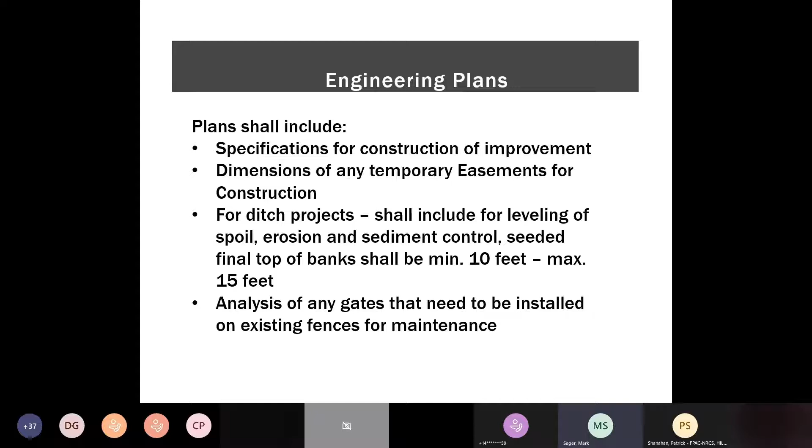There's going to be still analysis of any gates or existing fences that might be taken out and whether they need to be installed or maintained on this project. We don't run into this a lot, but sometimes it is out there.

After survey plans and specs are complete, the board shall prepare a schedule of damages to be included in the estimate. Estimate of cost of construction shall include construction costs to meet specs, the schedule of damages, and any costs incurred in investigations, consulting services, notifications, and other incidental costs. So they kind of left us in there for putting in those costs for mailings. If you had to send out soils for lab work and there was a cost associated with that, or if you had to get a consulting engineering company in there to help out, you could include that into your estimated cost for the project.

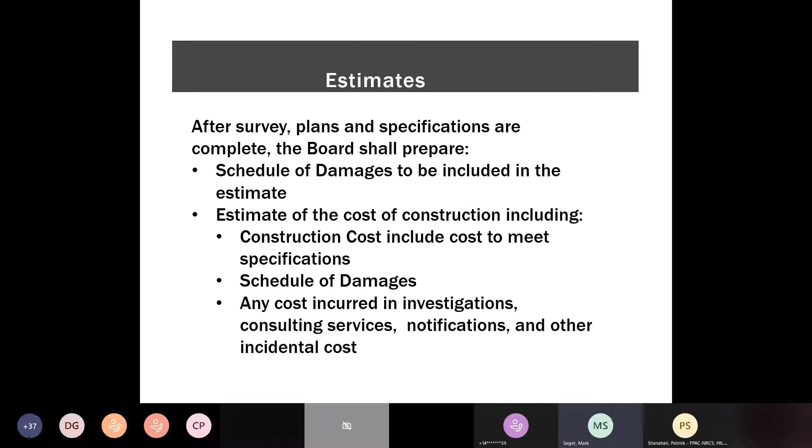Okay, schedule estimated assessment - so you've got your plans, your specs, your damages. The Board of Supervisors or designees shall prepare estimated assessments. Currently it says the Board of County Commissioners. I know that a lot of districts were doing those estimated assessments, but now it's coming back to the Board of Supervisors or their designee. I'm not saying you can't work with the county engineer or the county commissioners to make sure it's all on board, but you can include that.

I want to step back just a quick step in who's invited to the view and the hearing. It is recommended, or requested, that you invite the Board of Commissioners, the county engineer, and any other folks that may have an interest in this project down the road. It doesn't say they have to be there, but it does tell you that you should invite those folks so they're informed of this project as it's moving forward.

Again, sodded strip, you can find this in 940.26. Current law says 4 to 15 feet. Basically now it says no fewer than 10 feet for that sodded strip. That sodded strip shall be compensated by removal from taxable valuation of the property. Current law, only those in excess of 4 feet are removed.

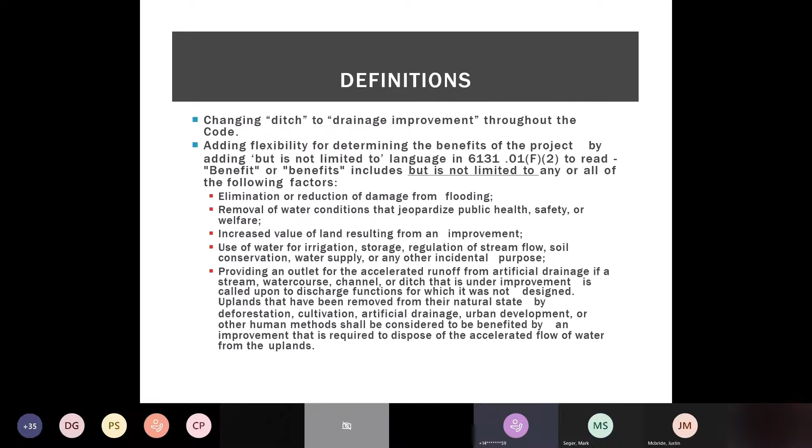Clarifying the definition of that amendment, it gives exactly 21 days after the view so they can expand the length of that. If they want to expand that area so it expands the watershed, it becomes a new petition. We do this so that process doesn't have to start over.

So you don't have to restart the view again. It just goes from that point on.

They've revised the bond amount to be filed with the petition, revised to $1,500 plus a sum of $5 for each parcel of land in excess of 200 parcels. Current law is $500 plus a sum of $2 for each parcel of land in excess of 200 parcels. So you can see that bond amount for filing a petition has gone up.

They did this to clarify how the records of proceedings are filed and recorded. It didn't really match as to how the county supervisor or county engineers and commissioners were filing their records.

The view clarifying the view in the first hearing must contain the updating timeline, define days - again, it's calendar days, not work days. View timeline: not fewer than 30 nor more than 120 days after the date at which the petition was filed with the clerk. Current law is not fewer than 25 nor more than 90. So it gives them a little bit longer, but it also clearly defines when it must occur.

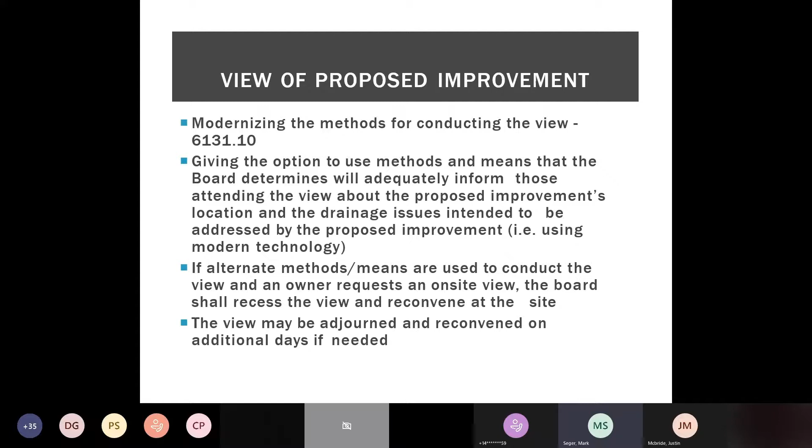Again, the owners are notified by mail, and it talks in there about how they can file an amendment to that petition. The view - we modernized this, so hopefully there's no more lawsuits about how you actually conducted that view, because it should leave it open enough to the technology so that you can see it. But a landowner can ask you to go see a specific area if he wants to.

They clarified the first hearing a little bit, defining the logical progression for conducting the hearing for improved readability of the section. There's a dismissal of the petition, appeal process. It clarifies that if dismissed, a bond will be used to pay costs, and the remaining funds returned to the petitioner.

Chain of title - I'm not going to go through this, but it was put in there for 6137 because we wanted to make it more clear for whenever land was transferred from one owner to the next, that it was a little easier to find that information, that there was a drainage easement on that project.

This right here should look the same on the estimated assessments as 940, so that we were using the same process for determining assessments or schedule of assessments and damages.

The assessments about how they're to be mailed out. An owner may file an exception to the engineer's schedule of assessments or a claim of damages for compensation not less than 5 calendar days before the date of the final hearing.

So here this process is a little different. They could appeal after the board of county commissioners voted. Here, they need to file 5 days before the date of the final hearing if they have an exception to the assessments. Here they try to modernize the appeals and reconcile with current law.

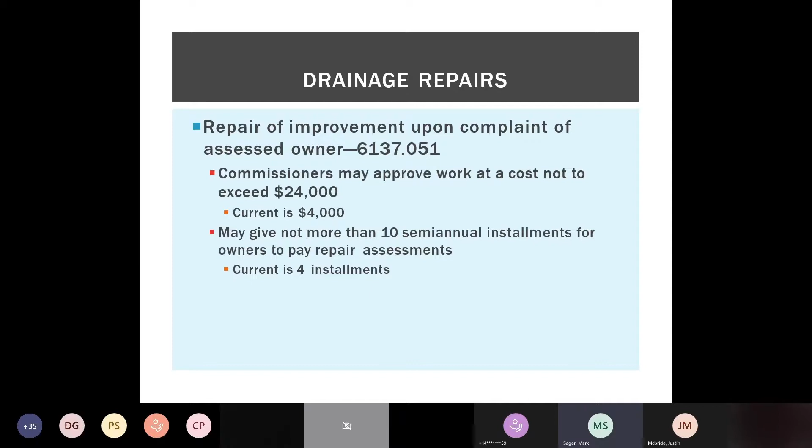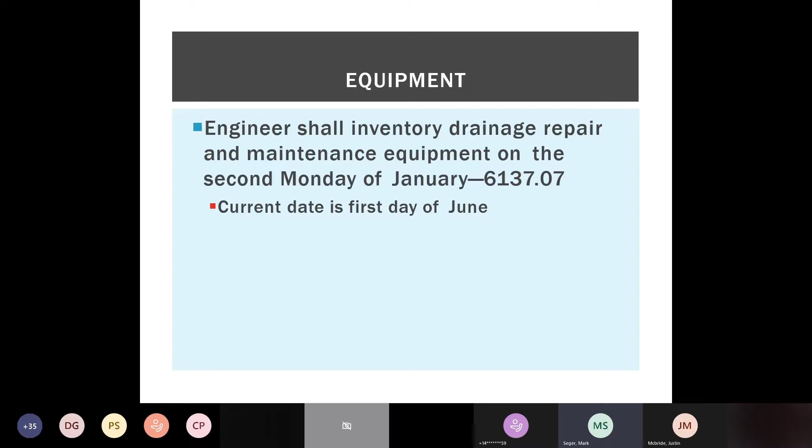Engineer shall inventory drainage repair and maintenance equipment on the second Monday of January. Current date is first day of June. County engineers wanted this to match their calendars, I guess. So that's why that change occurred.

Reduction in maintenance assessments. Clerk of County Commissioners shall file with the county auditor at least a list of owners granted a reduction in maintenance assessments for the current year. Current is to file by the 1st day of July for any owner granted a 50% reduction.

Board of Commissioners may approve the permanent maintenance base prepared by a county engineer, as opposed to the estimate of construction cost, in lieu of the original cost of improvement. If approved, the total estimated cost of improvement shall be the permanent maintenance base used to calculate maintenance fund assessments. The approved estimate of construction total cost shall serve as a permanent maintenance base until such time as it is revised. So they give it in there that you can revise that permanent maintenance base.

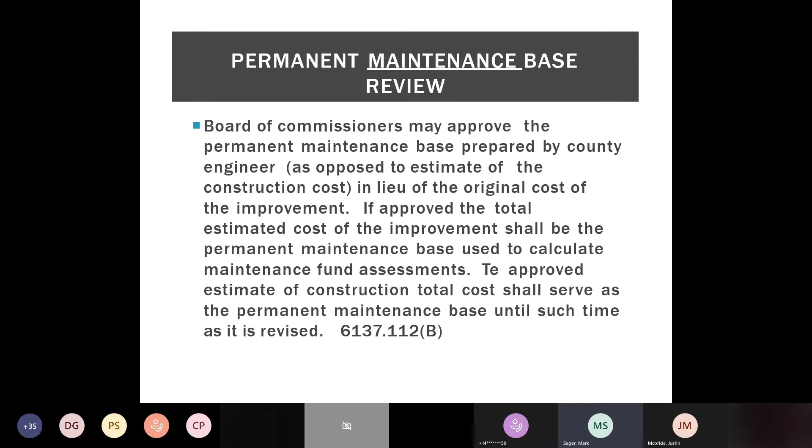New section: in case of open ditch log jam removal projects where a 25-foot clear easement is not created adjacent to the bank, a 25-foot easement may be created adjacent to the wooded riparian corridor for maintenance access. It was hard for the maintenance easement to only be 25 feet from the top of bank where you were working on a project that was log jam only. So now it allows them to create that 25-foot clear easement outside of that wooded corridor so they could pull those logs out of there. Hopefully that makes some sense.

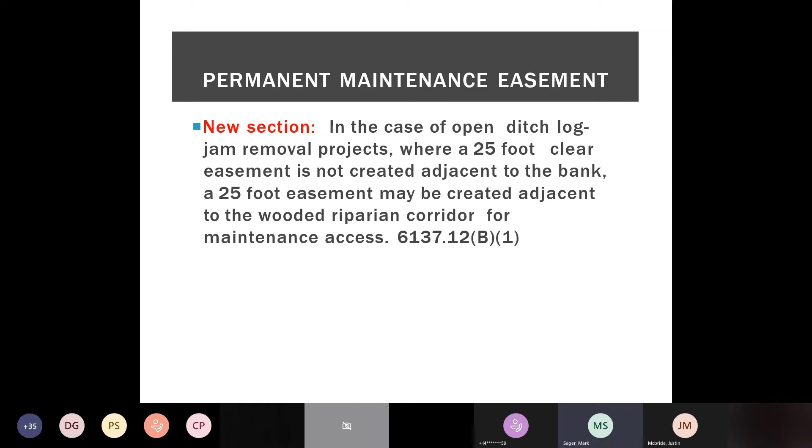Okay, that was a lot of information. I encourage you to read it and go through it, work with your prosecutors. Again, I think this will be better. I know we had a lot of involvement from a lot of different county engineers, county commissioners, county soil and water boards, supervisors, county technicians. Myself was involved with that. I think it's a better process, a little more clarified. Joint county project is clearly defined in there. Go read that section. If it's not, yell at me because I was the one that helped write that, I guess. So any other questions?

There was one more that popped up in the meantime. Okay, our Soil and Water Conservation District technicians with appropriate NRCS job approval authority, are they able to sign the preliminary report? You stated that that report needs to be approved by an engineer. I'm going to have to go look at the law. I guess for preliminary reports, if you have job approval for it, I would think it's okay, but I need to actually read what the law states in there. I don't know the answer off the top of my head.

Sorry. Okay, do you know who it is so I can get back to him? It's Defiance Soil and Water Conservation. Okay, got another one that popped in here.